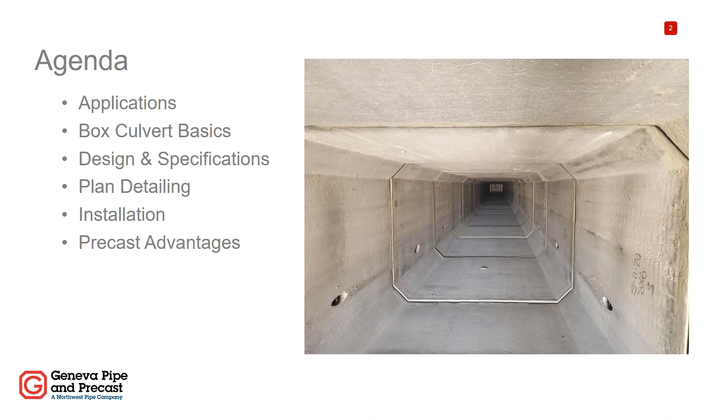As just mentioned, I've really been involved a lot with box culverts, but there was one box culvert project in particular that really made me smile, and it means a lot to me because I know how much it means to Mr. Jason Allen too. That was a project once where I caught Jason meditating inside a box culvert, just happy as can be. As you can see, he's just lit up, and man, he's excited. So I don't know if you remember that or not, Jason, but that was a good time. There's really nowhere better to meditate than in the middle of a box culvert, and actually, while they're trying to install it around you is usually the better place. So any engineers out there that really want to get a good meditation when someone's trying to install a box, just go climb down in there and meditate. It's great. You gotta wear a tank top and shorts though. That's the rule. That's right.

So there you go. With that being said, I believe we have a poll question. Absolutely. We want to gauge who's on the call here, so we're just going to launch this poll. Just a quick yes or no, so we could see how many of you have been involved in the design of box culverts. Have you ever designed or specified a concrete box culvert? Yes or no? If you're in full screen mode, you may have to minimize out of full screen mode so that you can vote. I just wanted to see how many of us have been involved in specifying or designing a box culvert.

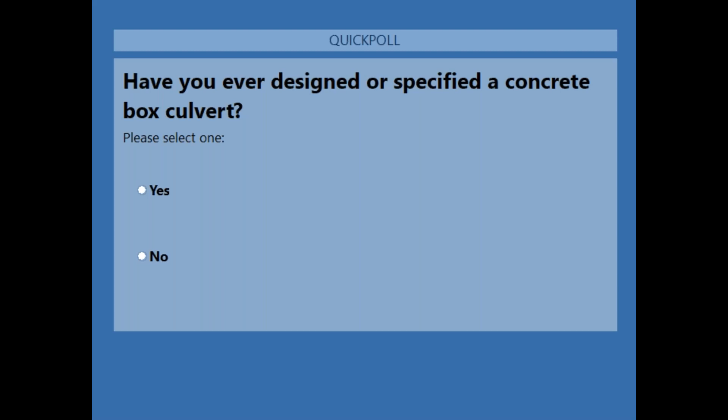So it looks like a majority, Mike, about 60% have designed or specified a concrete box culvert, and about 40% said no. So this is kind of a good grouping, almost half and half. So we'll be able to kind of take a look and go over the basics with them. So that's good. Good to know. Great. Yeah, that's great information. We'll spend a little bit of time on it, and maybe there will be something even the people that have designed one will learn here.

But okay, so first of all, what are some of the applications we can use box culverts for? There are many, many, many, but some of the main ones I've dealt with over the years, probably the most common one is just water conveyance, right? Our culverts for our creeks, our streams, storm drain, just water conveyance. I think that's probably the first thing that comes to most people's mind for box culvert.

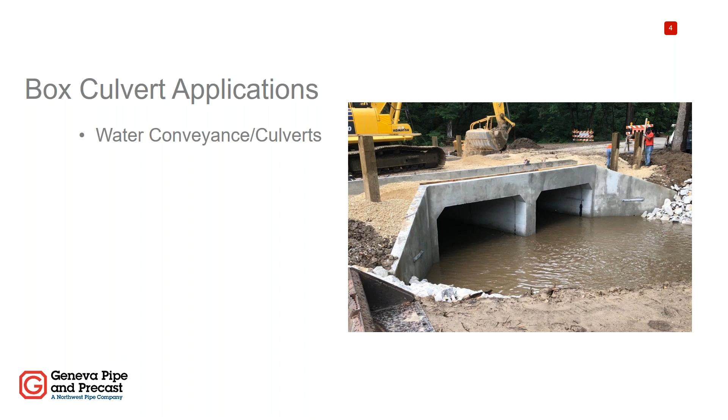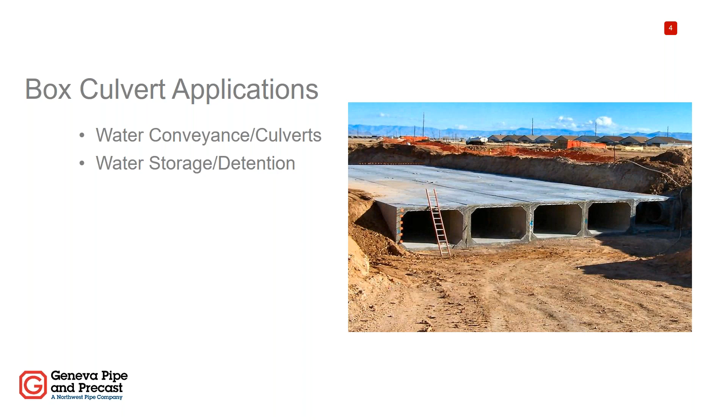Another one that I've done quite a bit is water storage or detention. This is really popular in the Pacific Northwest up in Oregon and Washington because land is so valuable and there's really nowhere to store stormwater effectively. And so they're putting them underneath parking garages, underneath parking lots, buildings, and it's just to store all of that water. So they're a great product for that as well, as you can see there.

Pedestrian access tunnels. We have a few of these here in the state already. I believe Jason did a project spotlight of one down in St. George of a pedestrian tunnel. I know we've done a few golf cart pedestrian tunnels as well.

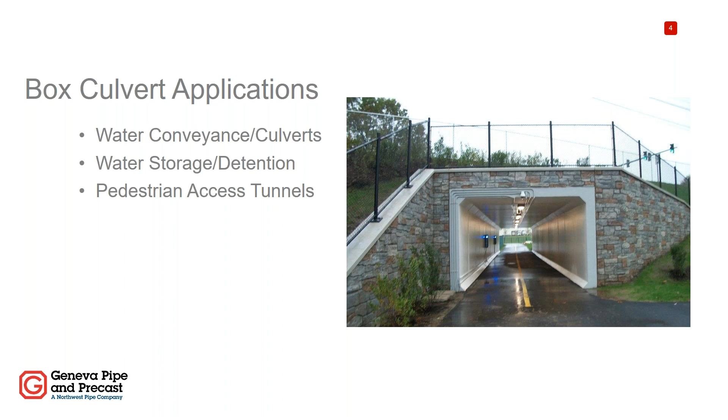Utility tunnels. Maybe you have to run multiple utility lines, and it would be a lot easier to group them all in some kind of box culvert or trench. That's another word you could use for smaller box culvert is trenching. But we've actually done some where it was on a mountainside, and because you have to separate your sewer and your utilities and your water so far, they could not do it because it was running up a mountainside. So the city said, if you'll put it all in a box culvert, you can put them all together so we have access to each one of them for service.

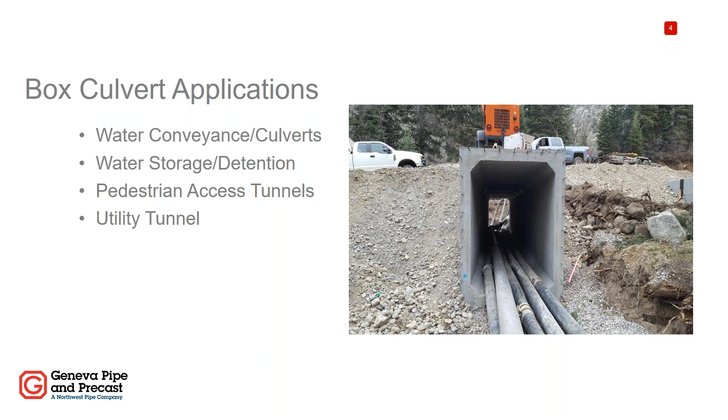Wildlife underpass. This one's just kind of a funny picture, but we've actually done quite a few wildlife underpasses. Some deer undercrossing, an elk. We did actually an antelope overpass up by Jackson Hole because they learned that antelope will not go underneath into a tunnel, and so they actually built the box culvert or the bridge for the traffic to drive under, which allowed the antelope to walk over. So this is actually a pretty popular use as well.

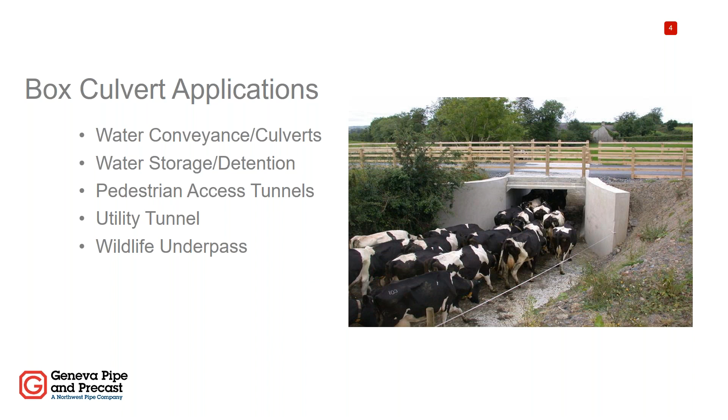Now I would say over all the culverts I've done, probably 99% of them, the span is larger than the rise, or at least equivalent. And so it's usually not that big of a deal, but every now and then I have seen where the rise is slightly larger, and usually I'd say that's when it deals with pedestrian access. So maybe it's an 8-foot rise by 6-foot span. So you do not want to call that out as an 8 by 6 because that could be really confusing to manufacturers and designers. So just try and always remember, you want to call the span out first and then the rise.

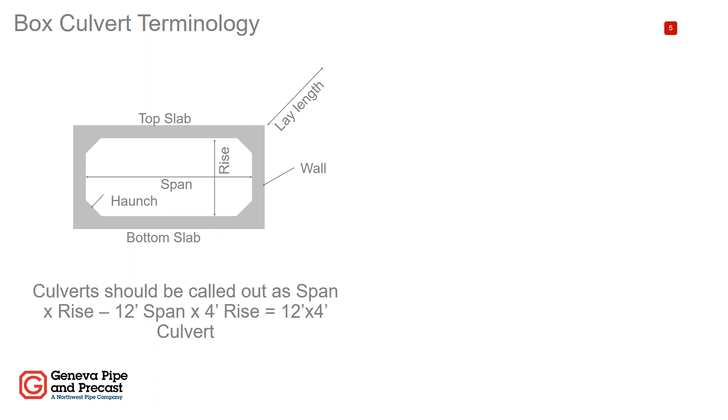Now a haunch. We use haunches in precast box culverts just to help with the structural integrity. It gives you some rigidity in the corners. And also we use them because it helps make a better product for quality and aesthetics. Our forming has haunches and it allows the product to be able to strip easier.

So how do you call out a haunch? If somebody says we have a 12-inch haunch with our form, what does that mean? Does that mean that their diagonal dimension is 12 inches? Actually, no, that does not. When calling out a haunch, it would be the horizontal and vertical dimensions. So if a manufacturer tells you we have a 12-inch haunch on our form, that would mean that it's a 12-inch by 12-inch horizontal by vertical area.

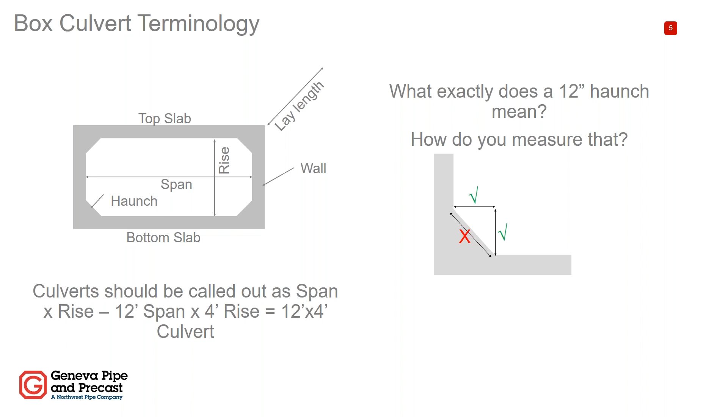Now, we can build box culverts without haunches, but we would prefer not to. It's a lot harder on the design, and it takes a little more with the forming and the manufacturing, so it can be done if there's an absolute critical reason that you do not want them in your culvert. But for the most part, usually it's not a big deal, and most people are okay to have haunches.

A little more terminology, pretty basic, but the male joint on a box culvert, you could call it a tongue or a spigot. It's a lot like reinforced concrete pipe. So the male end is the tongue or the spigot, and the female side would be the groove or the bell. So again, pretty basic, but good to know.

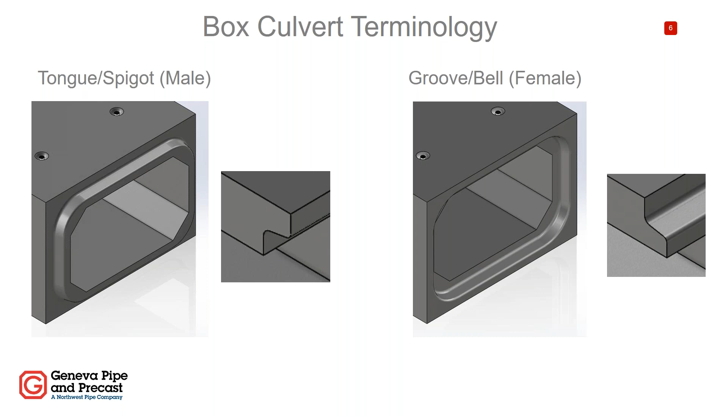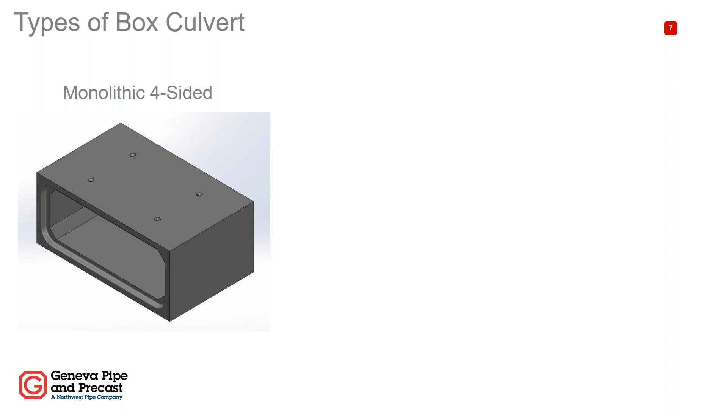Okay, types of box culvert. There's actually quite a few types of box culvert. The most common one is what we would call a monolithic four-sided. And we call it monolithic because that means the entire box is poured in one single pour. It's monolithically poured. And this is the most common. I would say, I don't know, 85% of the culverts I've dealt with over the years are this monolithic four-sided.

Another one, I don't know if I'd call it common, but it's becoming more and more common, is this split culvert style where it's a bottom half, top half. And this is becoming a little more popular because of the size restrictions, and jobs are getting bigger and bigger. I would say in general, projects that I'm seeing, whether it's box culverts, vaults, pipe, manhole, whatever the product, everything just seems to be getting bigger. And so when you get bigger, you start thinking about, how do we transport these sections, how do we lift them, and how do we install them?

I think I mentioned at the start that I've done as large as a 28 by 20 box culvert. You could imagine a 28-foot span by 20-foot tall box culvert. I don't even know how you would ship that. You try and lay it down and it'd be 28 feet wide. If you stand it up, you're obviously way too tall. So you can cut this in half and have the joint right in the middle and stack them on top of each other for a larger culvert. We've done 2 or 3 of these actually for UDOT just here in the recent past, and they've really been successful.

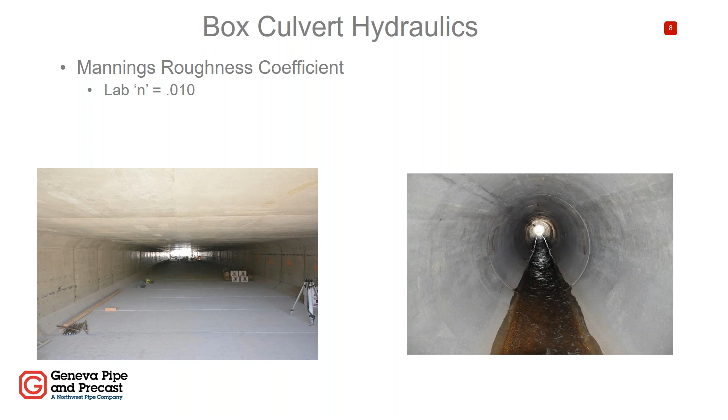But a lot of the testing we've done and ACPA has done, we see a coefficient of 0.010. With that being said, for precast, we recommend using in your design a 0.012, just to be conservative and make sure you're okay with the hydraulics you need.

Now, for cast in place concrete, someone might ask, I've seen a lot of concrete callouts in books as high as 0.015. Why are you guys lower, and why are you seeing better results? And I think the quick, easy answer to that is, cast in place concrete, typically speaking, isn't quite as smooth as precast. And that's because we're using steel forms that are designed for exactly what we're doing, compared to a cast in place structure that might be using just custom paneling forms. It's relying on guys that are doing an actual hand finish. And so they recommend a little bit higher for cast in place concrete.

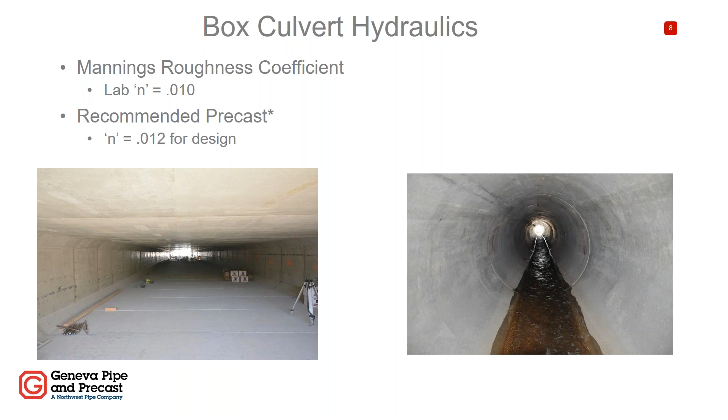And some of that is because on that large diameter pipe, a lot of times we will use SCC concrete, which gives just an absolute smooth glass type finish. It's that wet cast concrete compared to the dry cast. If people are familiar with that, we use both the dry cast and the wet cast. And so it probably is closer to the 0.010, if not even lower, but just kind of a funny side story there.

And then in addition to that, all pipelines require some sort of cover over top of the pipe. Flexible pipe a lot of times will require, I think, 1 or 2 feet minimum. RCP, the basic and suggested is 1 foot of cover. Now we can design for less than that. So those numbers don't account for fill on top of the structure either. This is just from invert to top of structure.

And with a box culvert, you actually can have the box culvert top be the driving surface. And we're actually working with UDOT on a project right now where they're having our box culvert top. I believe it's coming out to bid, or it just came out to bid, but the box culvert top will be the driving surface, and they will be tying their roadway into the box culvert on the side. So you can see how much headroom and how much more advantage you can have with a box culvert.

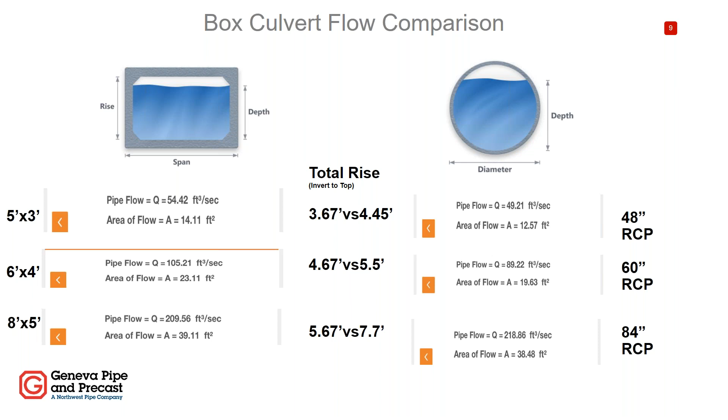Okay, so that kind of gets into, people might ask, so what size of box culverts do you guys do? So when talking about, if you remember the monolithic four-sided, ASTM has some tables which we'll get to here in just a minute, but they have design charts that go from 3x2 up to 12x12. As mentioned, we can go larger depending on the manufacturer and the forming and your application. And so when all else fails, you can always just reach out to us and talk to us about it. But typically speaking, 3x2 to 12x12 is in the specifications.

And I know I've talked to Oldcastle and I know what Geneva's potentials are. I would say a good rule of thumb for both of us is if you add the span and the rise together, you should try and keep it at about 30 feet or less. And if you can do that, we probably can do it in a monolithic four-sided box culvert. Now, obviously, tell me, hey, can I do a 29 foot by 1 foot? I'm gonna tell you, no, that's not realistic. So you can't just always say 30 foot is the absolute rule of thumb, but it's a very, very good starting point if you don't know otherwise.

And then the other things you have to think about and look at when thinking about sizing is, how are we going to ship it? How are we going to handle it? Where is this project going? Is it realistic to have a 60,000 pound structure being installed underneath power lines? So there's just a lot of things to look at when looking at sizing. But in general, that gives you a good rule of thumb to start with.

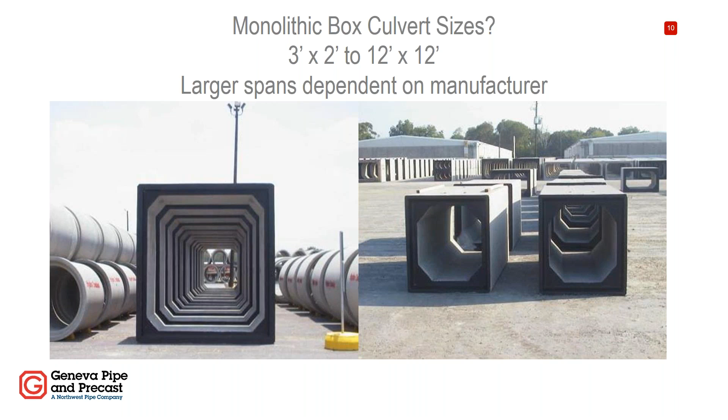So now talking about specifications, the history of box culvert specifications started with AASHTO and ASTM. For the most part, the ASTM specifications and AASHTO specifications pretty much mirror each other. And a lot of the AASHTO specifications actually refer to ASTM. And I know there's a few of them that say refer to ASTM C850 for the most up-to-date design, because I believe ASTM updates a little more frequently than AASHTO, but for the most part, they go hand in hand. And the first two main specs that came out for precast box culverts are the C850 and C789 and the corresponding AASHTOs.

And what they had there was, one was for box culverts that had less than 2 feet of cover, and one was for box culverts greater than 2 feet of cover. And the main reason they did that, and it's still kind of true today on how you design these, is because when you hit that 2 feet of cover, it completely changes the way you distribute your live loads through the soil. Less than 2 feet of cover, you distribute the loads through the concrete lid or deck itself for the most part, and then above 2 feet of fill, you rely more on the backfill and the cover over the structure to distribute the wheel loads. So it's quite a bit different way to design. So they had two different specifications for that.

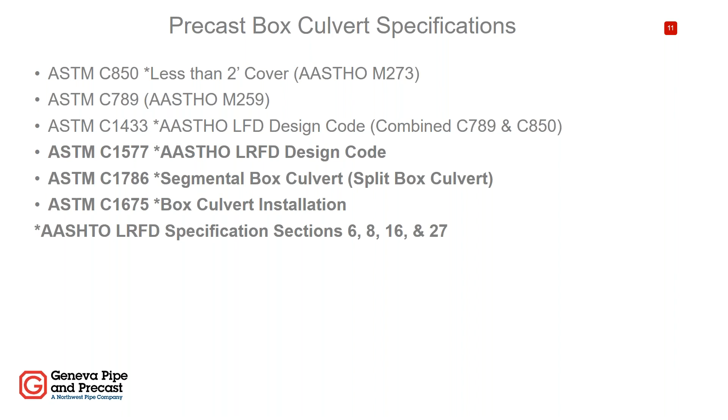With that being said, let's look at the 1577 code a little bit more in depth, because as I mentioned, that's probably 90% of the culverts we deal with. And it's also the AASHTO LRFD code. The one thing I really like about the 1577 specification, it's a design and manufacturing specification both. Not all ASTMs hit both sides of the precast.

Some of them are just manufacturing specifications of what you can and can't do in the facility. Some just tell you how you're supposed to design the structure per the LRFD code or per ACI, or using different load factors or live loading. This is an all-encompassing specification that has both design and manufacturing. So it is a really good specification to use. And there's a lot on here. I'm not going to sit here and go through it. I just kind of wanted to highlight.

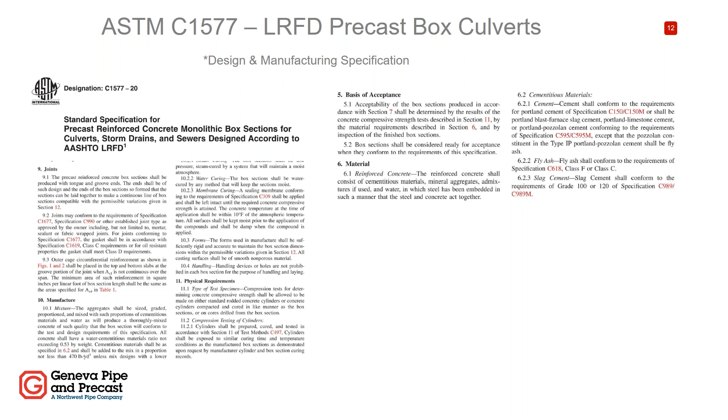If you look at just some of the main bolded points here, it talks about joints and what you have to do for joints and joint sealant. There's a manufacturing section that talks about your aggregates and your cement and how you cure the product and what your forms can and can't do. There's physical requirements. There's tolerances in your box culvert. It goes through the materials on your reinforcing that you can and can't use.

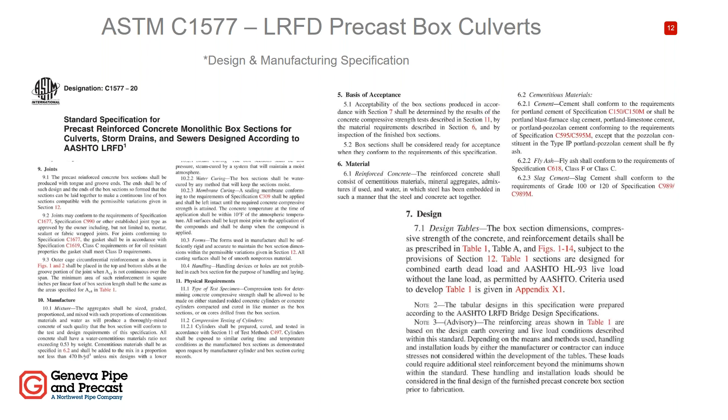And then the design part of it, there are design tables in there that are already given for typical box culvert sizes using the AASHTO code with an HL93 live load, that if you don't have maybe engineering, or you have a very simple project that fits the mold of these tables, you can use these tables, and it's already been designed and accepted nationally per the AASHTO LRFD code.

So you can kind of look at that and say, does my project meet all those requirements? And if it does, maybe I can use that table. If it doesn't meet those and the loading requirements are more than that, or it doesn't fit in that box, you can always do your own structural design, which that's what the manufacturers are here for. Both Oldcastle and Geneva, myself and Troy Banks with Oldcastle, we are registered PEs and we both design box culverts all the time. So it's something we do very, very easily and quickly.

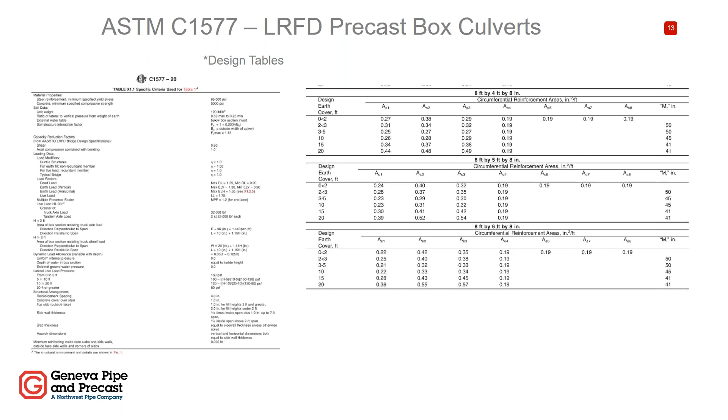Now you're going to ask, well, what is an AS1? That makes no sense. I've not done precast. I don't know what AS1 is. Sure enough, in C1577, it has a detail and shows you what all these requirements are. And again, there are 2 requirements. There's fill height less than 2 feet, and there's suggested reinforcing, and then there's a fill height greater than 2 feet.

Any ideas why that would be? Jason, do you have any thoughts of why we would have to put that in for less than 2 feet compared to not? Yeah, I mean, you've got obviously much higher live loads, and so we want to make sure that we've got extra steel in there to accommodate that additional live load. Exactly. When you don't have that fill, if you remember, I talked about with less than 2 feet of fill, we rely on that concrete deck to transfer the loads through the structure. So how do you transfer a load running in and out of the page?

If you're looking at the page, how would you transfer a load from bar to bar and distribute that load through the concrete if there's not reinforcing to do that? And so that's why it's required there. Whereas above 2 feet of fill, I mentioned the loading is distributed through that soil, and so you don't need it. You still have to have minimum reinforcing for temperature and shrinkage, but you don't need that extra amount.

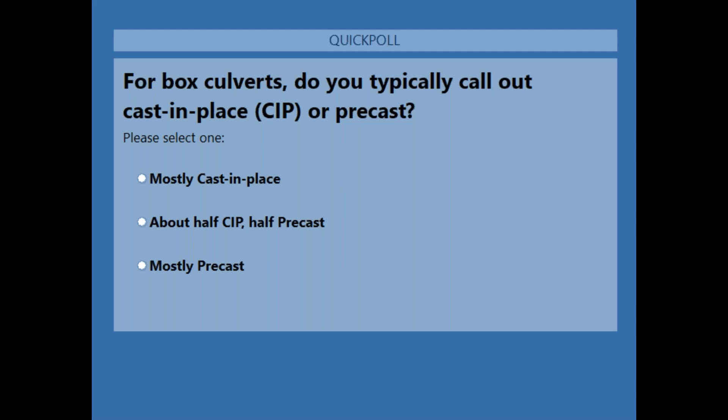All right, we've got about half of them voted, so we'll give you a little bit more here. I'm realizing it's taking a little more time than I thought, so I'll try and scoot along. About everybody voted, so I'm going to close this out and we'll see the results. And it's kind of what I was hoping to see. About 85% said mostly precast, so an overwhelming majority are mostly specifying precast, and so that's good.

The next one, we wanted to know kind of what you're calling out on your plans. Do you mind if I launch that one too, Mike? Absolutely. Let's go ahead and launch it. So when you're calling out a precast box culvert on your project, do you typically perform all the structural calculations yourself? That's A. B, just call out the size and length and let the manufacturer design it. Both A and B. Or I don't spec precast box culverts. So if you don't spec them, just go ahead and say I don't spec them.

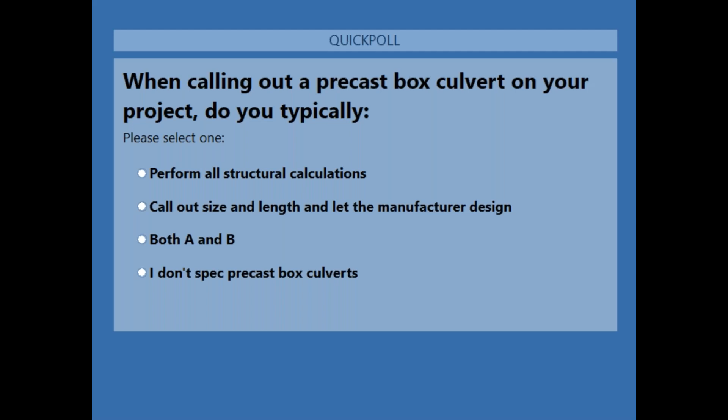So about half have voted. We'll give about 10, 15 more seconds to let everybody cast their vote. All right, maybe just a bit more, and this is exactly what I wanted to see. A lot of efficient engineers out here. I'm going to close it and share it. Look at that. 100%. Call out the size and length and let the manufacturer design.

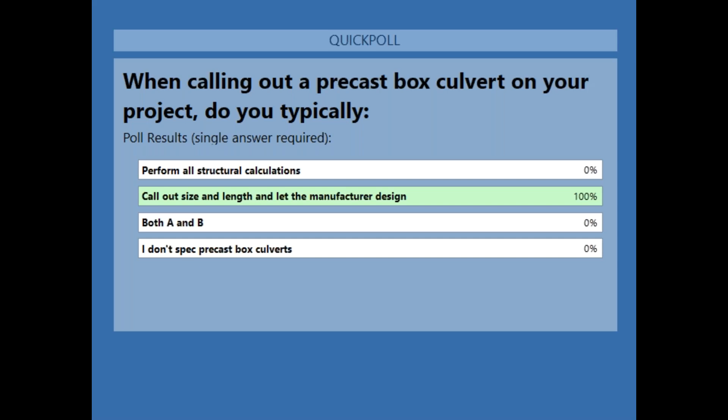You know, that's what we call in the business the law of conservation of energy. My mom used to call it the law of least effort, but we call it the law of conservation of energy. Don't do more work than you have to. If we've got structural engineers that can do it, let us do it. So perfect. That's all I got for those polls. Mike, I'll turn it back over to you.

Awesome. That means we can fly through this a little bit quicker and maybe get to some fun stuff. So since everybody does it properly, how should we detail and design a culvert? You guys all probably know this. Contact your local manufacturers first and foremost. Call Geneva, call Oldcastle, get with us on what we can do, what we can't do, what would be more expensive, less expensive, and let us help you design the most efficient culvert we can for your client, and they'll be really happy with you. Another really important thing, call out certified plants.

If you do a design as an engineer and you make all these requirements and you don't have a plant that has a certified quality certification, your work as an engineer is almost invalid because you don't know you're getting what you asked for. So whether it's NPCA, ACPA, UDOT certified, whatever it is, make sure you're calling out a certified plant.

Make sure you call out some specifications. What specifications do you want to use? You know what, Jason, why don't you go ahead and just mention the specifications? Absolutely. So we have a specification that we wrote. It's available to download on our website. This was written by members of the Mountain States Concrete Pipe Association. We all came together about 4 years ago and put together a precast box culvert specification that engineers can use.

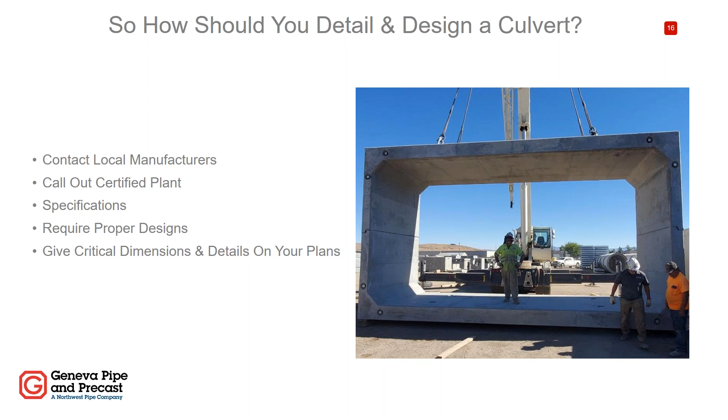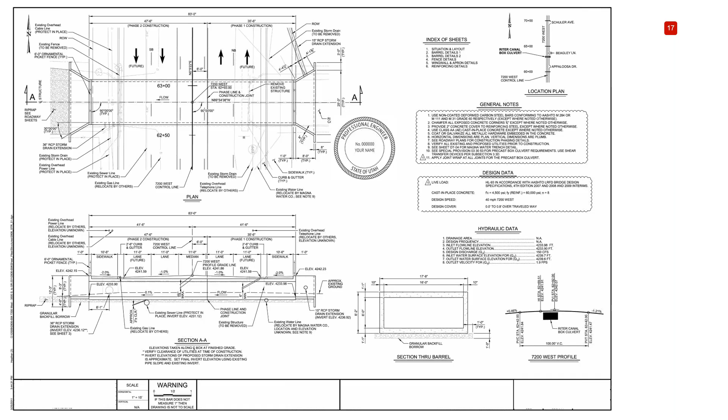Okay, installation. This one is really, really critical. One of the most important parts after we have built our culverts is to make sure your foundation is proper. If you have an unlevel, uneven foundation, you are going to have problems with point loading. You're going to have gaps because culverts don't come together because maybe the back end of it is a little lower than the front end.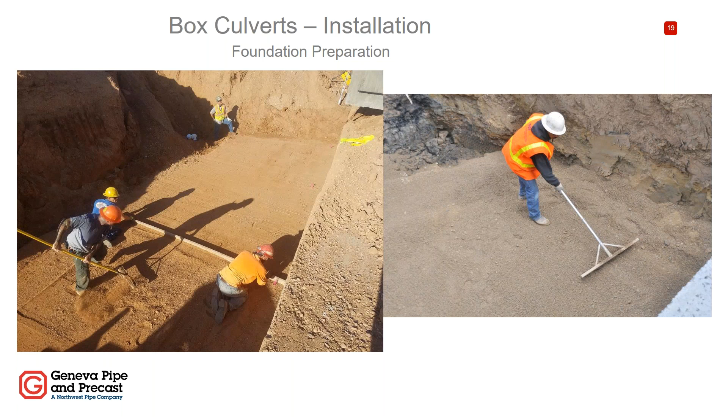And the most successful culvert projects I've seen installed are when we require a leveling course. And I believe we call out for a 2-inch leveling course. And that is included in the specification that we wrote, Mike. Oh, great. Thank you, Jason. Yeah. So if you have a good base material under it, sure, you can go ahead and use that base material, no big deal. But if it's not a good material, you might want to over excavate 6 to 12 inches and get a good granular material in there.

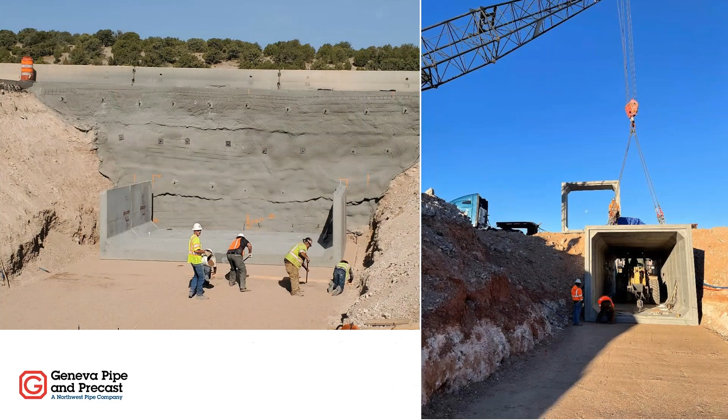But for the final grade, it sure helps to have a couple inches of a pea gravel or just something that can be raked and leveled easily. Every single successful project, here's a couple more good pictures you can see, they're screeding that top layer almost as if it was concrete. And then you get a much more even surface to put your precast on. Both of those are UDOT projects, and both of those they screeded and leveled, and the projects went really good.

I'd say the sections were going together within 1/8 of an inch for the most part. So it's super, super critical. I can't emphasize it more. Make sure that grade is set properly.

Now, how do you install a box culvert? You would want to start downstream, and you put your first piece in, and if you remember, it would have that female groove there on the right. And then you want to lower down the male end, lower it into the hole and pull the male spigot into the groove. So you're installing left to right, and typically your flow would then be right to left.

Now that flow being right to left, not only is that good because you're installing downhill and you'd rather pull boxes downhill than try and pull a box uphill. But if you look at those joints, it just makes sense to have the flow going from right to left. If you can picture water going over top of that spigot or tongue and over top of that next groove, compared to if you took flow the opposite way, it would, in my mind, want to be hitting that spigot and going into the joint more. So for so many reasons, it just makes sense to start at the bottom, start with your groove piece, and pull your spigot or tongue piece into that groove.

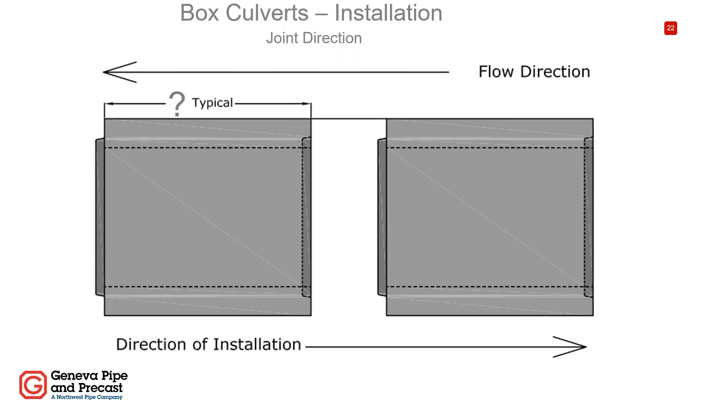Now, how do we help you do that as a contractor? Both manufacturers put little pulling anchors in the walls, and you can hook a come-along up to that or some pulling chains, and you pull the boxes together. Now, the best way to do that is to have the crane, or however they're lifting that box culvert, hold roughly 80, 90% of that weight. If you can get it to where you're not picking it up, but you are picking it up, if that makes sense, if you could somehow pick it up 1/32 of an inch, that would be perfect. Because now the weight is off, your joints are aligned, and you can suck those precast sections in together. Works really, really good, and I know both manufacturers do that.

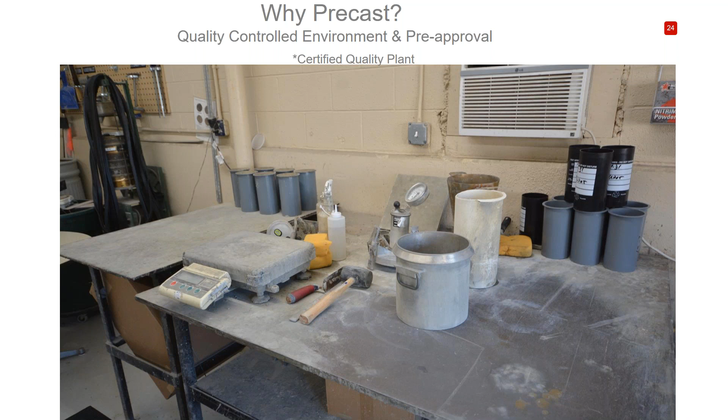So end of the day, really quick, we'll wrap up. Why precast? First of all, we build all of our products in a quality controlled environment. Nice buildings that are warm. We're not dealing with the elements in the winter, or in the summer as much as out in the field. And the product is pre-approved before it goes out to the site. So if we have a problem, it's not a shutdown of a road for an extra month because we have to redo something. We've already approved the product before it ever gets on site.

National design standards and manufacturer design liabilities. As you guys have seen, there's already national standards with the AASHTO code and the ASTM specs. They're used every day all over the country. And then the manufacturer design liability. You don't have to design it as an engineer. You don't have to try and figure out how the heck do I design a cast-in-place box culvert. I got to go back to my 101 concrete class in college. I hope I caught everything. It's going to take me all week to design this thing. Put all the liability on the manufacturers.

Speed and ease of installation. These box culverts go in so fast. I'd say on average, you can get at least 25 feet an hour of box culvert put in. And I've seen as much as 50 feet an hour, depending on how quick and good the crews are and the way the foundation is prepped. So why is that a good thing? Well, obviously, the shorter you can keep roads closed, the less impact we have to the community. Time is money, right? Nowadays, everything is quicker, quicker, quicker. Be done faster. Why is the road closed?

Jason, I think you've had some experience as a city engineer, right? Dealing with people being mad about closures. Oh yeah. There's a lot. I know there was a project that we did on 7200 South, a major roadway. It was going to be closed for almost 2 months, but they were able to get the thing done in 2 weekends. They opened it up, got half of it put in, closed it, opened it up the next weekend, and so instead of 8 weeks of calls and complaints, they got it done in like 2 weekends.

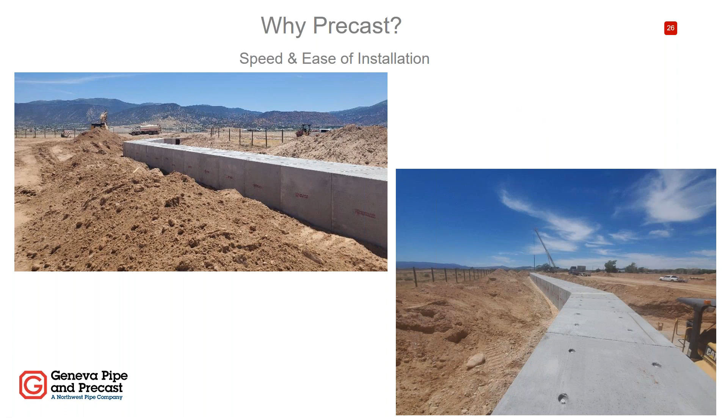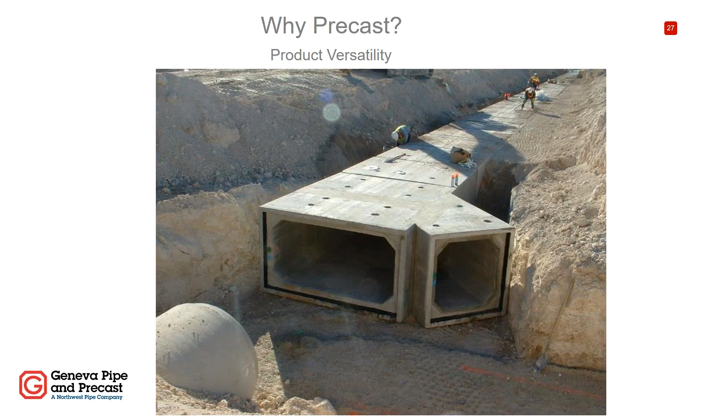So that's a pretty big deal there. Yeah, time is money now. And then kind of the last comment I'll make is versatility of what we can do. Because we have facilities and because we have the time, we can take the time to do some pretty custom things. We can do some pretty cool things that would be really hard to do in the field and would take a lot of time. Yes, it might cost money, it might take a little bit longer, but if you plan properly and you work with the manufacturers on what makes sense, we can do some pretty awesome things.

So this is one that we're working on with UDOT. It's not been installed yet. I think it's installing this December, but you can see it's pretty massive. It's a double cell 26 by 17 inside dimension box culvert. So it was the split culvert. It's out kind of by Monticello, out in the middle of nowhere. So another unique thing, other than obviously the massive size of this, they cannot get any concrete out there in any kind of reasonable, efficient manner.

So these wing walls, you can see the wing walls there in the corner, they're as tall as 25 feet tall. That typically does not lend itself towards precast. But I worked with the design engineer in UDOT and with the GeoGrid company. I don't know if anyone's familiar with GeoGrid, but we're casting GeoGrid into the back of these wing walls, and they're essentially tall MSE walls. So even though we're precasting them, they're gonna be able to install these and not cast them in place by using GeoGrid tieback. So that was kind of cool.

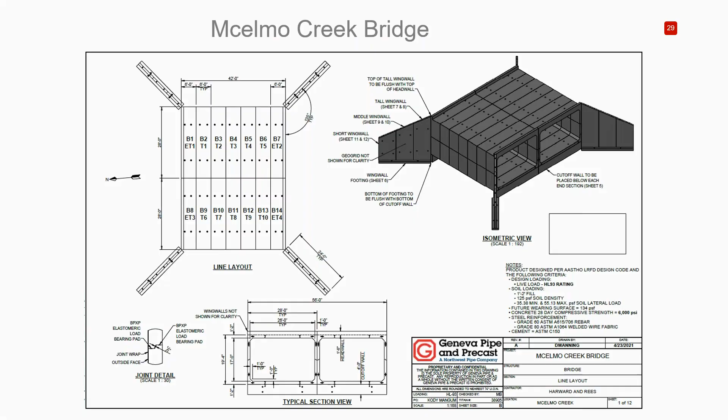This one was one I did a long time ago. BYU Idaho, up there in Rexburg, Idaho, built an auditorium of, I want to say it's like a 20,000 student auditorium. And they were trying to figure out how to do their air return ducts underneath the stadium. And we came up with 10 by 7 and 8 by 7 box culverts that went underneath this massive auditorium as air return. It's basically just for air return.

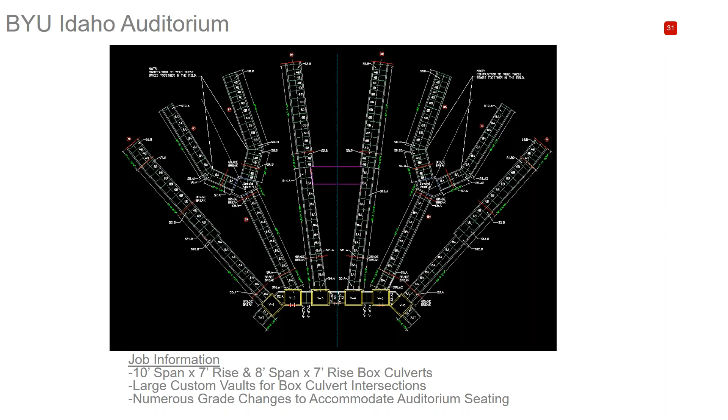And if they would have had to cast that in place, can you imagine? I mean, look at this. If you cast that in place, that would have taken, oh man, 6 months maybe. And they installed this, I want to say they installed this in a week. So pretty cool there.

Hey, before you move on to the next one, Mike, I do have a couple of questions that came in. Oh, great. One of them was, what about precast wing walls or end sections? Yes, we can do those as well, right? I mean, that's usually not a problem. We could put those in, and they'll cast and go right up next to it. And so I think that's what they were asking, is if that's a capability, if we can do it precast, and the answer is yes, we can.

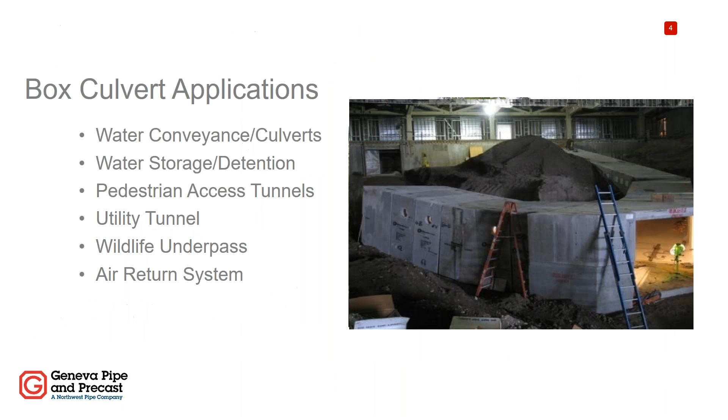The other question was, for the haunches, is there ever a case where the haunch wouldn't be equal in both the vertical and horizontal directions? You said like a 12-inch haunch is 12 inches on the rise, 12 inches on the span, but is there ever a case where your haunch is not the same in both directions?

For our purpose, from the manufacturer and design side of it, no, we would never want to do that. Right. If for some reason you need that for some really awkward, weird, specific reason, we can look at it, and there could be a potential that we could do it. But from our end, we would rather not do it.

Right. Looks like you brought up the first picture there where it shows some precast end sections and wing walls there, and cutoff wall there. So yeah, great example of what we can do precast. Yep, that last box culvert piece there was attached to that head wall and wing wall. That was all one section. And I know both manufacturers can do that. So yes, that's a good question, and there was a good picture for that.

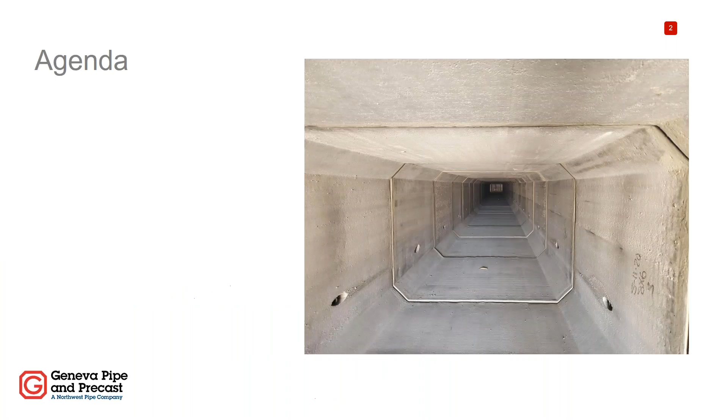So those are all the questions we had, and I think that's about all the time we've got, Mike. We're on the hour. So do you have one more that you want? I know you showed this snake one. Let's show this one. This is a cool project. So we'll do this one and then be done.